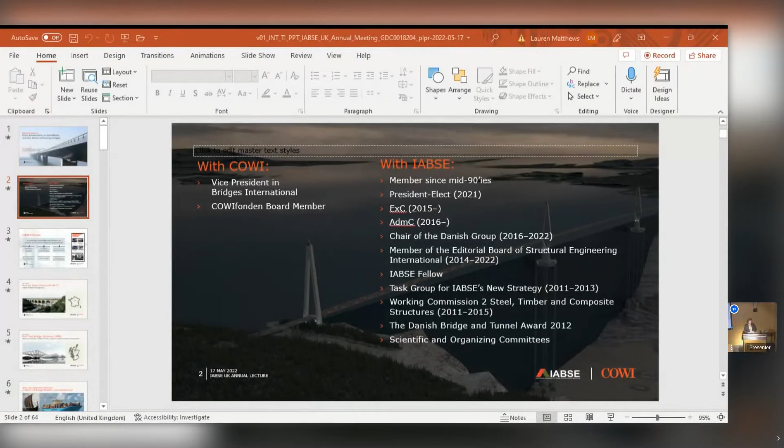So that was a bit about my activities with IABSE, and as Ian said in his introduction, it's really a very interesting and valuable aspect. What I like about it is that it embraces all aspects of structural engineering, all types of structures and materials, and all phases of the life of a structure, from initial ideas until rehabilitation and eventually demolition. It deals with historical structures as well, so there's really something for everybody and every taste. We're close to 3,000 members in over 100 countries, and we'll soon be celebrating our 100 years anniversary. So I think there's a lot to celebrate in the association.

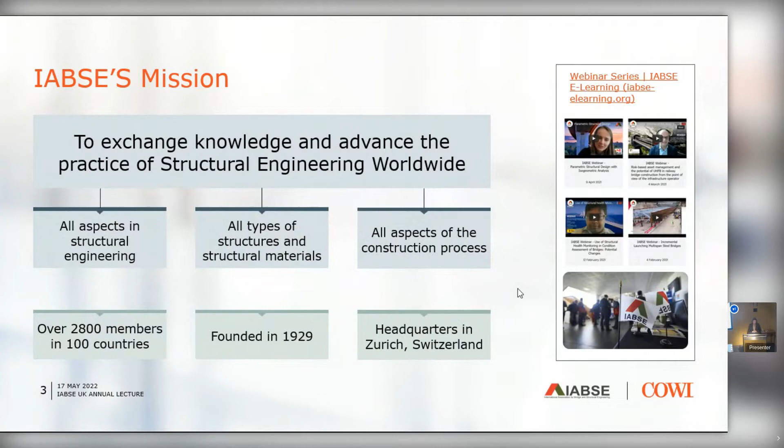So why are structures so important? As Ian quite rightly said, tonight we're probably mainly focusing on the B, on the bridges, but the S&E, structural engineering, is equally important in the association. It just happened to be bridges tonight. I've picked a few examples of historical bridges or structures that I think illustrate why structures have this potential to become so iconic.

Pont du Gard is, for me, a good example. It was built more than 2,000 years ago as an aqueduct, and it served as an aqueduct transporting water for 500 years. Then it fell into disrepair, and it wasn't really used until 270 years ago, when it was upgraded with a road. As you can see behind the lower level of arches, there's actually a road now passing across the river. I think that's a good illustration of how old structures can be put into new use and become a very meaningful part of current infrastructure.

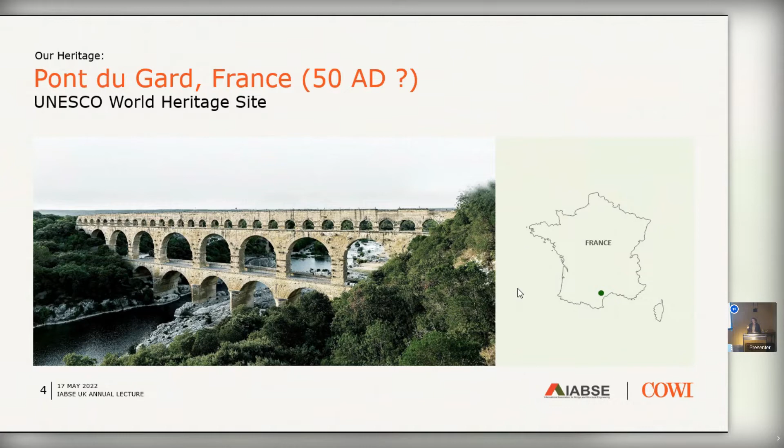Another one I like is the Forth Rail Bridge in Scotland, which, as the name says, carries a railway. It's a cantilever truss, and it held the world record for longest span for over 25 years. I think that is amazing - considering today's world records are suspension bridges, but back then it was actually a structure like this that was able to hold the world record for such a long period of time. It is a massive structure, but I think it's beautiful in its own way, because the form illustrates the function, and you can read how it was built out of the structure itself. It's a wonderful example of a structure where somebody put a lot of effort and skill into it, and it's still in operation - over 130 years still in operation. These are really great examples for inspiration.

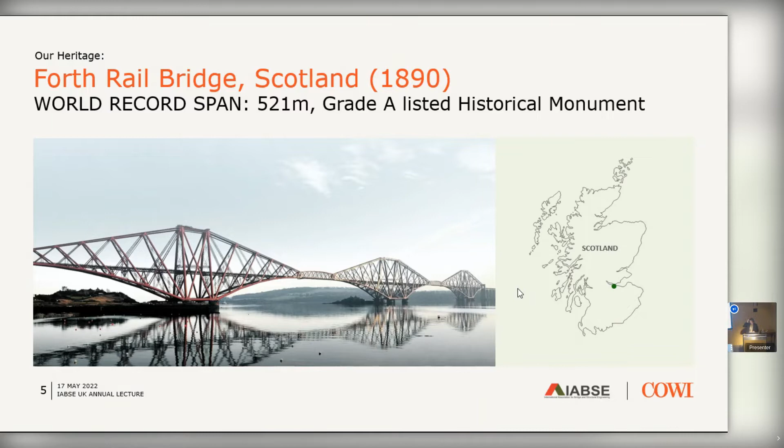So none of these bridges had any Danish input, or at least very little. So how did Denmark become a nation of bridge builders? To tell you the truth, I actually think it started with us being seafarers. I couldn't resist the temptation, being in London tonight, to throw in a picture of a Viking ship, or at least a replica of one - and perhaps I should apologize for the mess that we caused in the process.

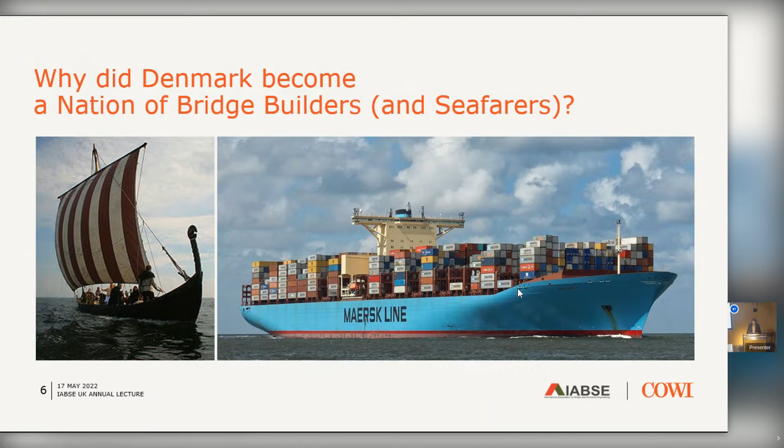We're still sailing the seven seas. This is one of the biggest container ships at the moment. It's owned by Maersk Line, a Danish shipping company. So somehow it is linked, and it is, of course, because our country consists of over 440 islands, and there has always been a need to cross the sea or cross obstacles somehow. So I think it's fair to say we started as seafarers, but we became bridge builders.

I would also note that it's a very flat country. The highest natural point in our country is 170 meters above the sea. So we are very concerned with rising sea levels and the effects of climate change. That is something that feels very real for a country with that topology.

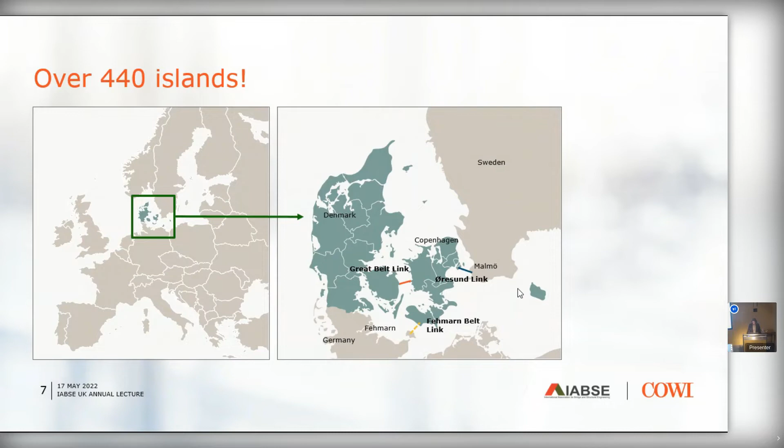We do celebrate our heritage, and here is a selection of the current Danish banknotes. On one side, it has artifacts from the Stone Age, the Bronze Age, and the Iron Age. On the other side, it has important Danish bridges. And on the biggest bill, we also have the biggest bridge, the Great Belt Bridge. So the entire collection of banknotes has a bridge on them, which illustrates how important it is for us.

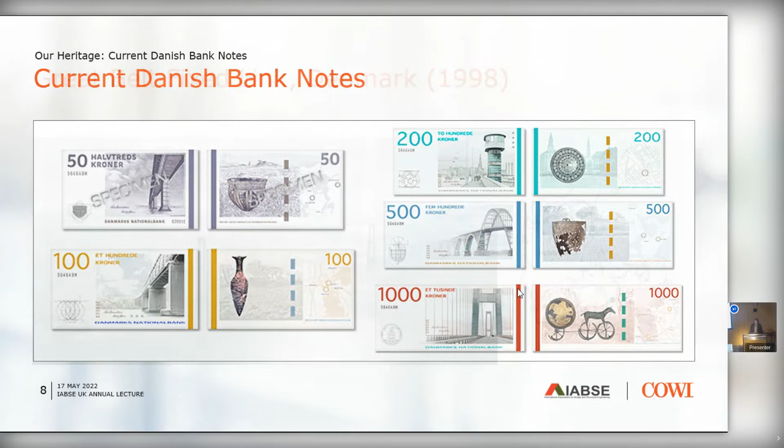So that takes me to the Great Belt link, and I understand there are actually people in the audience who have worked on it. So if you have some comments, please add your story.

This was the first project I worked on when I joined COWI in the mid-90s. It was the last phase of Great Belt, and during construction, after the main span had been closed, it was observed that it suffered from vortex shedding. We had hoped that when the asphalt was put on it would dampen it, but it didn't. So I was part of the team that had to, in all haste, retrofit it with guide vanes, little devices underneath the deck that suppress the vortex shedding.

According to our aerodynamic specialist, it is now as stable as an eye surgeon's hand. It did work, but it was quite an interesting piece of research, because there was an expectation that it would suffer from vortex shedding. But again, why fit something that's not needed? It's a waste of material and it needs maintenance. So I think there were some sensible decisions behind waiting.

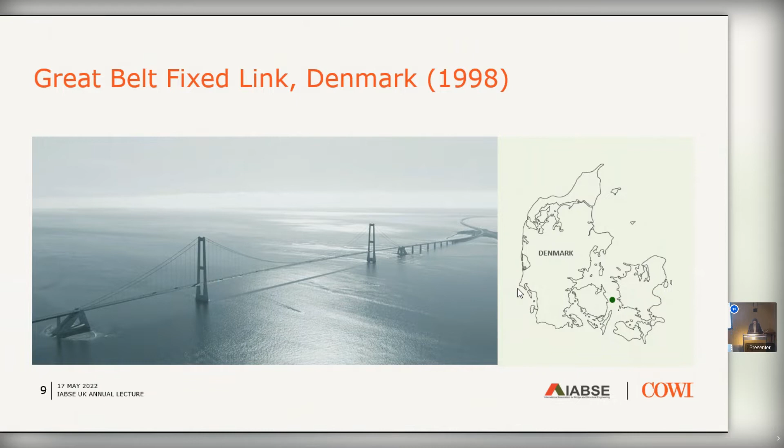If you're interested in cycling, I would encourage you to keep an eye out for this year's Tour de France, because the Grand Départ will be from Copenhagen, and the second stage will pass over the Great Belt Bridge. We'll close it—it's one of the most important pieces of infrastructure in our country, but we will close it for the Tour de France. On the 2nd of July, the peloton will pass on the bridge, and if we have weather like today, it will just be an amazing day.

Another early career project that made a huge impression on me was the Lions' Gate rehabilitation project in Vancouver. I was so fortunate to be seconded to Buckland and Taylor when they joined the COWI group, and they were working on this amazing project: a complete deck replacement of a suspension bridge which by then was 60 years old. It was so carefully planned that they could cut out sections during the night, fit the new section, which has a slightly different cross-section, and then it would be open to traffic the following morning. Really, it was just like clockwork.

With our aging infrastructure, we'll see a lot more projects like that. There is a need to upgrade our existing infrastructure and to get the most out of it—upgrade it to new use, to increased loadings, or whatever is needed. I think this is a great example of how it can be done.

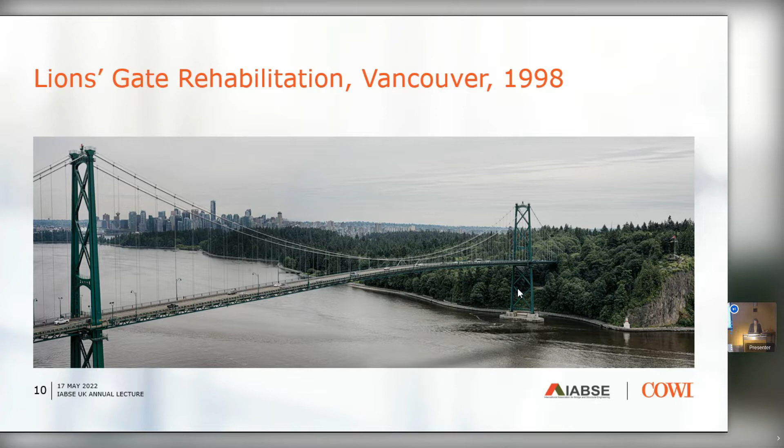And then, as Ian said, let's move to Stonecutters. I think this is a favorite that we have in common. For me personally, if I was to mention only one project, this would be the bridge I would highlight. I worked on the project for 10 years, so it has made a huge impact on my professional career. It started during the design competition, and I'll come back to who won that design competition—you probably have guessed by now. But I was on the other side, part of the team assessing the entries in the design competition. It was really interesting comparing the different schemes and seeing the imagination the teams put forward. I think there were 25 entries.

Then I moved on to be involved in the detailed design, finishing with 3 years on the construction side. Needless to say, the lessons learned and the feedback you get as a young engineer working on a construction site, you just can't pay for it with money. It's so valuable, and I would encourage everybody to have that experience.

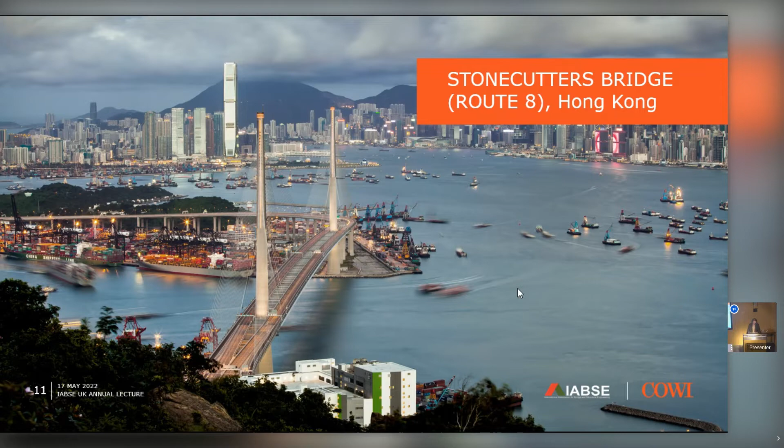So the parties involved - we should probably start from the bottom, because the winner of the design team was a group with Halcrow, Flint and Neill Partnership, as they were called back then, SMEDI from Shanghai, and Dissing and Weitling Architects, who came up with a stunning design. And what is built today is very loyal to that design.

I would also say there's a small link back to the Danish seafarers, because I got this picture from a captain from the Maersk shipping company the first time he passed under the bridge after it opened to traffic. So that was quite nice to see what it looks like from that angle.

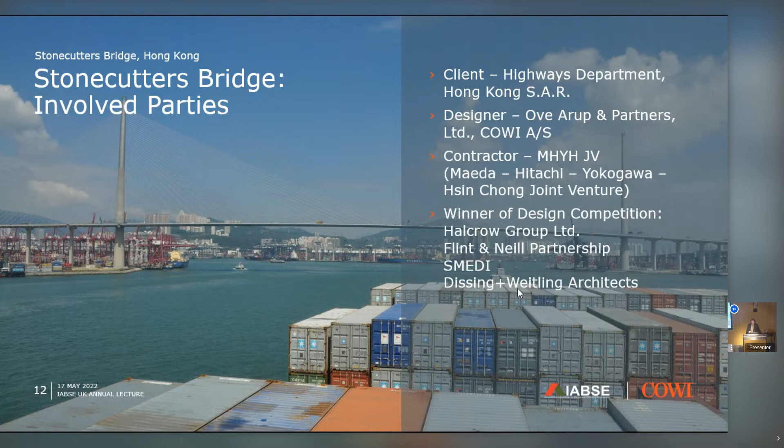What is special about Stonecutters? I think one thing to highlight is the prominent location. You can see it's right at downtown Hong Kong, so it's clearly visible from many areas on Hong Kong Island and the Victoria Harbour area.

It's prone to typhoons. Basically, it will get a direct hit, and it has been tested full scale by direct hits of typhoons. There's nothing to give just a little bit of slack on the wind loads.

It is spanning across the entrance to one of the busiest container ports in the world, so closing it during construction or during lifting of deck segments was not really an option. That was also part of the decisions that the design team made, or the ones who came up with the concept, that a cable stayed bridge would be a really good solution for this location. And in order to span the entire entrance to the container port, it required what was at that time a record span.

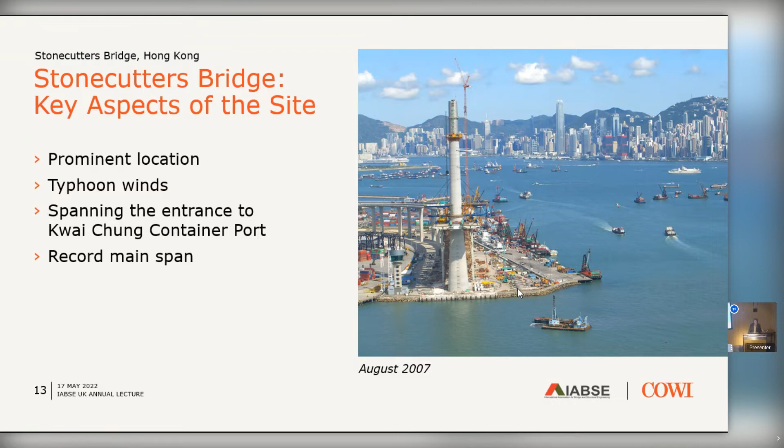So Hong Kong is prone to typhoons, as we heard a couple of times. What you see here is a track of Typhoon York. And the containers that have fallen down there - it's not even the result of Typhoon York, that was just a small typhoon that happened while I was there. Driving home one day, we saw, oops, there were some effects of that typhoon.

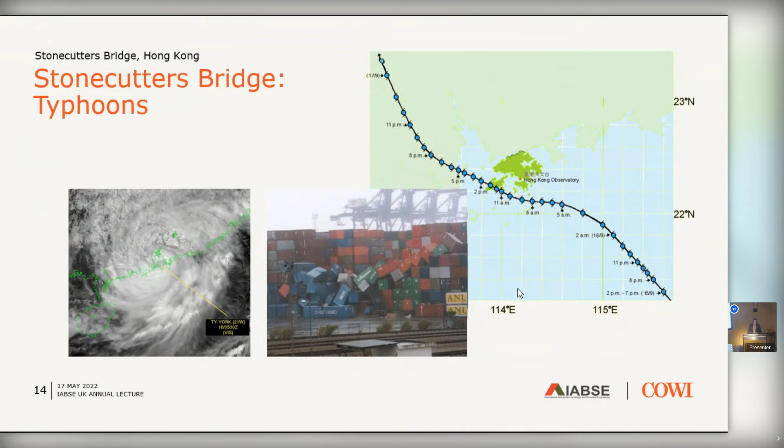So it was also appreciated that perhaps the design codes in Hong Kong were not fully able to provide what was needed as a basis for the design of a record cable stayed bridge.

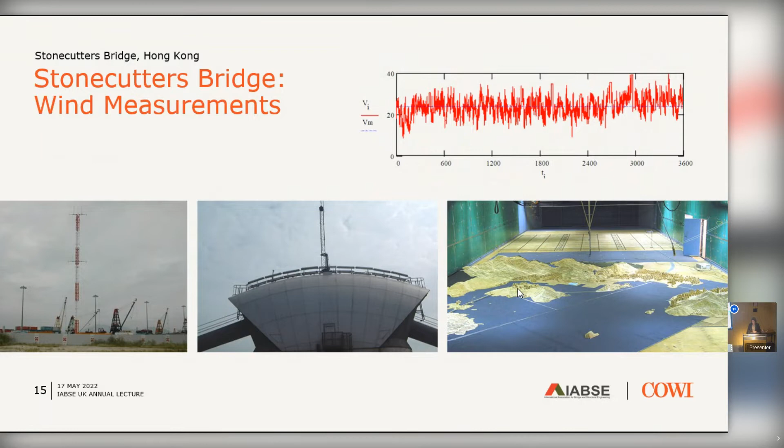One of the key aspects that came out of it was a combination of the characteristics of the wind, because it was very turbulent at that place. There are some quite high hills, definitely higher than what we have in Denmark, 500-meter high hills nearby. It was extremely turbulent, and the vertical component of the turbulence played a decisive factor in the wind loadings on the deck. That was, of course, a combination of the layout of the deck and the characteristics of the wind. We're taking that learning with us in other designs of twin decks, as we'll see a little later.

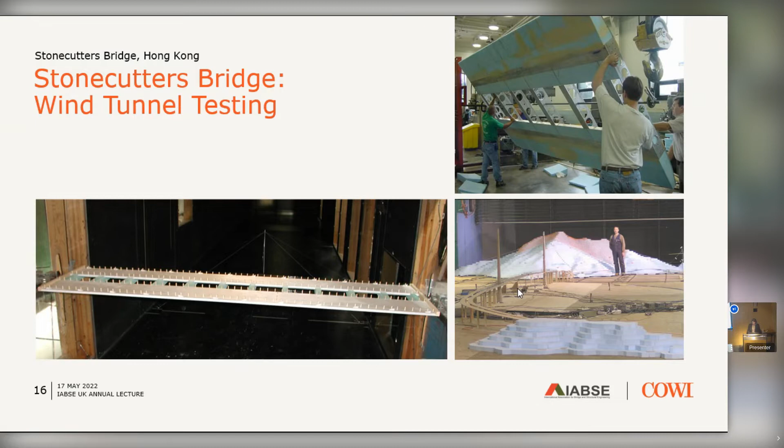So then I came back from Stonecutters in 2008, and it was a little bit of a difficult transition working on a site and then getting back into the office. I have to say, it is so enjoyable to be able to go out there and look at things and discuss with the contractor and find solutions together. But I moved back in 2008, and then I mainly focused on project management.

I haven't listed the projects here, but I worked with a couple of you in the audience on some of them - tender designs, detailed designs, checks, and the first concepts for floating bridges started at that point in time. And then I moved into line management as well.

During the same period of time, I became very active with IABSE, mainly thanks to COWI's CEO at that point in time, Klaus Ostenfeld, himself being a former president of IABSE and being very focused on technical excellence. I think that's very much the DNA that runs through the company, and through Flint and Neill Partnership, who joined us, and Buckland and Taylor, who joined us. It's very much driven by that wish to push the innovations and the boundaries of technology.

So Klaus introduced me to IABSE, and quite quickly in 2011, this group of people was entrusted with the responsibility of coming up with a new strategy for IABSE, which was at that point in time losing membership.

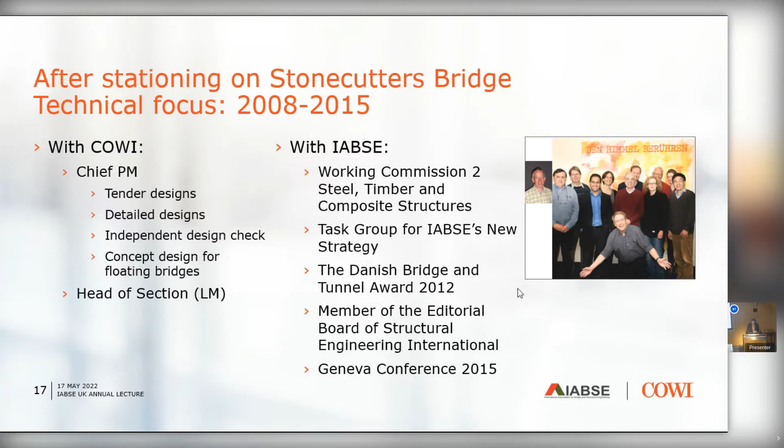Then the next steps for me - I became vice president with COWI in 2015 and a member of the foundation. COWI is owned by a foundation and by the employees, so the foundation supports research. We have quite large donations every year to various types of research, not only within the company, it's also sort of completely independent from the company. That's a very good way to supplement, I feel, what I do in my daily work.

And then with IABSE, I've been with the executive committee since 2016, and then president-elect as of October last year. I look forward to collaborating with Yaojun Ge on this transition period and making sure that all the good initiatives that have been started are also implemented and carried through. So it's a great honor.

How are we looking for time, Ian? Are we okay?

Good, then let's move on to some of these record spans, because during this period of time, we could see a global trend that the crossings that were put forward and proposed were becoming more and more challenging - deeper waters to cross, longer crossings, and if they're deep and long, they typically require longer spans.

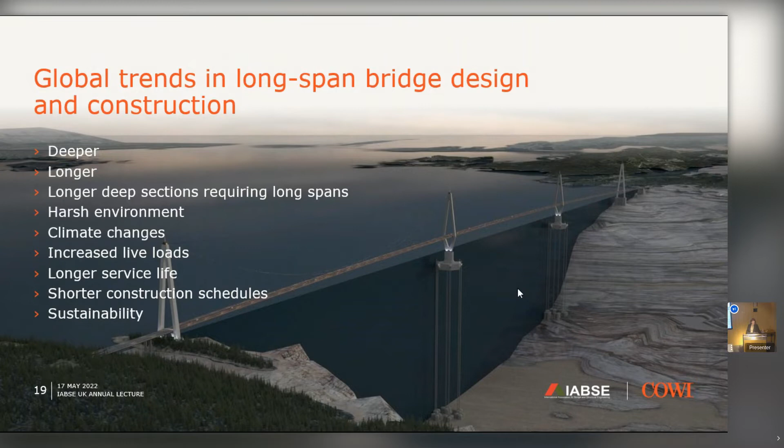So in order to do that, we need to come up with new technology, and we need to apply technology that may already be known in other industries, but bring it into structural engineering. We need to think sustainability, the benefits of digitalization, so we work really efficiently. And we need to design for the future - imagining what could be the future requirements for this infrastructure, and how we can make sure it is future-proof.

And in order to do that, it's really important that all the stakeholders collaborate. We need to pull in the same direction in order to be successful. This is teamwork - this is not something one single person can claim to do. So even though we all have a favorite bridge, I don't think any of us can say this is my bridge. Those days are over. It's really teamwork.

So let's move on to Çanakkale. First of all, the location - perhaps you can see the circle blinking down there. The blue dot in the middle, that's the Sea of Marmara, and up towards the upper right, you have the Bosporus Strait with the 3 Bosporus bridges. One of them, the most recent one, is shown there, Bosporus 3. To the right, to the east, you have the Osman Gazi Bridge, the Izmit Bay crossing. Then to close the circle and this motorway around the Sea of Marmara, there was a missing link, and that was the crossing of the Dardanelles Strait. So that is the Çanakkale Bridge.

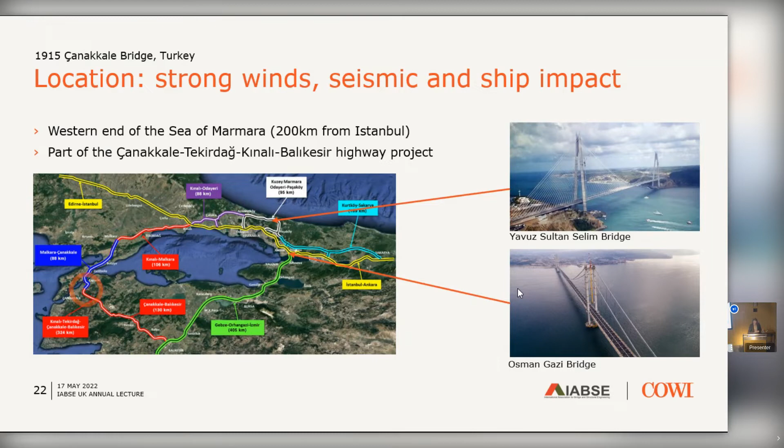So this slide is very busy, but it is really to illustrate that the red part is the important thing - the little green bridge there is just a component. Even though it can be very meaningful and challenging for bridge engineers like us to design a world record span, it's not a goal in its own right. It's because it's part of something bigger. In this case, it's part of an 85 kilometers highway that basically closes the loop and saves a lot of traveling time around the Sea of Marmara.

So what is characteristic of this site? Well, you look at the location of it - on one side you have Europe, on the other side Asia. So there's a fault line in the middle of the strait. The seismic activity is not quite as big as on the Osman Gazi Bridge, but it is quite high seismic loading. And the location near the east end of the Mediterranean Sea means there are high wind loads. As you would imagine, there's significant shipping traffic through that strait because it's the only route from the Mediterranean through the Dardanelles, Sea of Marmara, Bosporus, and then to the Black Sea. So there's a lot of shipping traffic, both container ships and cruise ships.

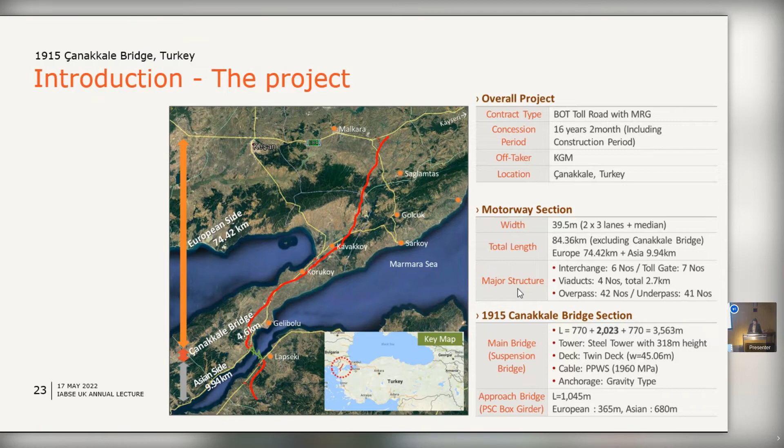There's a lot of symbolism in the design of Çanakkale, and that was there when COWI got involved in the detailed design, so there were some very strict requirements to the design. It is a historical site for the Turkish people, and therefore, in reference to 1915, it reflects on an important battle in World War I. It took place on the 18th of March, therefore the pylons are 318 meters tall. The groundbreaking ceremony was on the 18th of March, and the opening to traffic was on the 18th of March. So the symbolism is important.

And then the famous main span, 2023, that's quite an odd number - but it is because the Turkish Republic celebrates its 100 years anniversary in 2023. Originally it was intended that the bridge wouldn't open until next year, but construction was so fast and was accelerated that it actually opened a month ago. So in case you wonder what is in it, that's the explanation.

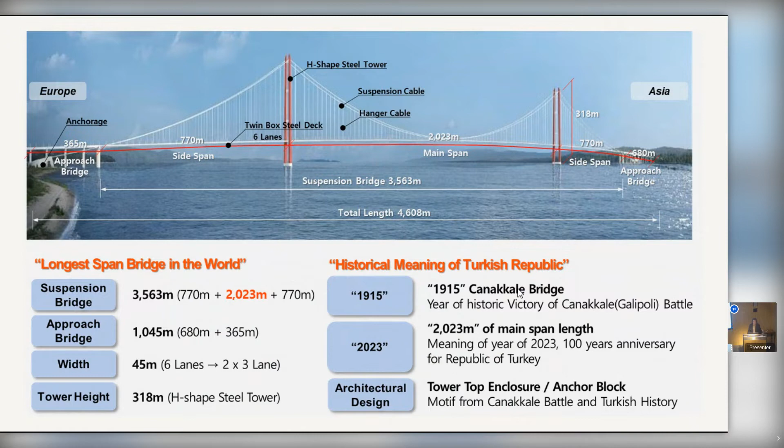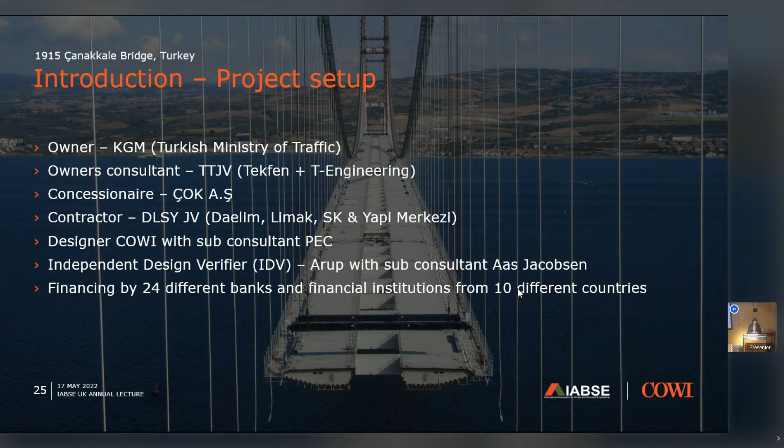The technical challenges include the ground conditions, not super favorable for such a big bridge, and we had to make some modifications. There's the seismic activity, as I already mentioned, and live loads - if you have such a long loaded length, then the live load becomes very significant. Wind climate dominated large portions of the design of the superstructure. And of course, with such a big bridge, just absorbing the movement was a challenge, so there were several hydraulic devices installed on the bridge in order to control the movements. Both the design schedule and the construction schedule were very aggressive.

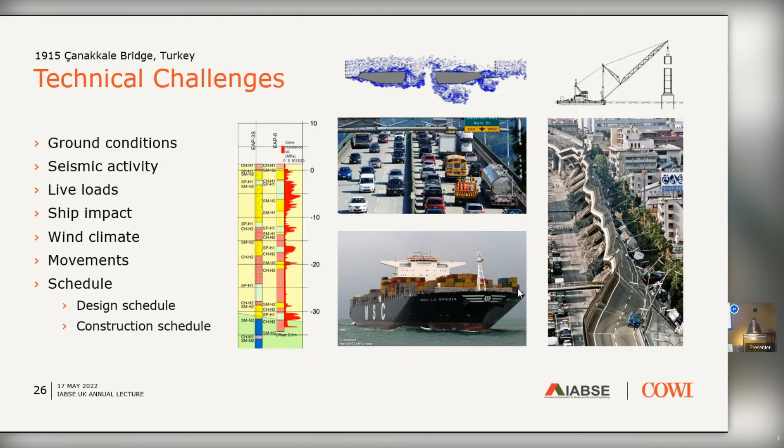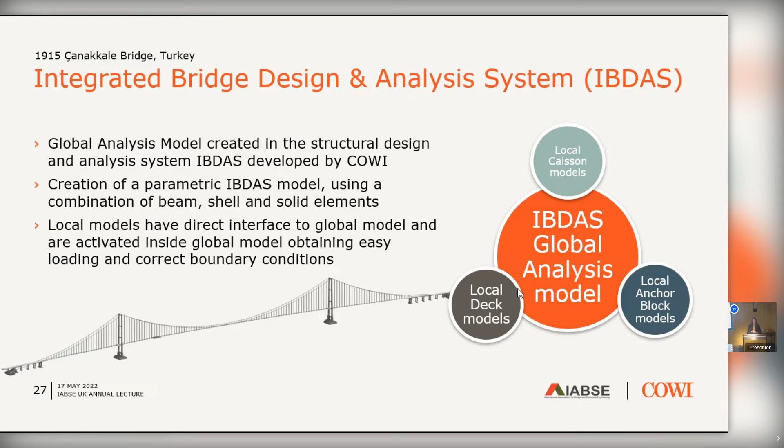In order to meet such an optimistic design schedule, we had to really optimize digital solutions and work efficiently with the data, not transferring data manually from one tool to another. In the company, we have our integrated bridge design and analysis system where basically everything takes place inside one big global model, including the construction sequences. The way we manage it, instead of having a big heavy model to work with, we have these building blocks - shell models of the detail we're currently interested in - and we can switch them on and off depending on whether we are looking at the substructures or the superstructure. In that way, we could optimize the analysis, and we also included the fatigue model in the global model.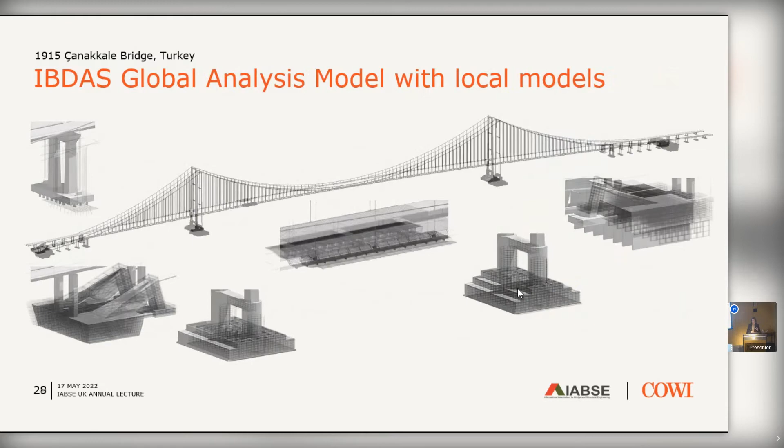That was actually based on a learning we took away from the Messina Strait Bridge, which I haven't talked a lot about yet, but I'll come back to it. That's actually a triple box arrangement because it carries both rail and road. During the design of the Messina Bridge, maybe 15 years ago, it was noticed that it was very important to have the global effects included in the fatigue stresses, in the stress ranges. We wanted to do that because we didn't want to be overly conservative - you can combine worst with worst, but then you're over-designing. As you all know, the bridge deck is carried by the hangers and the main cables, and the tower will ultimately take the compression force, so any additional weight in the deck has a knock-on effect on all the other structural components. So a lot of effort was put into really optimizing the bridge deck.

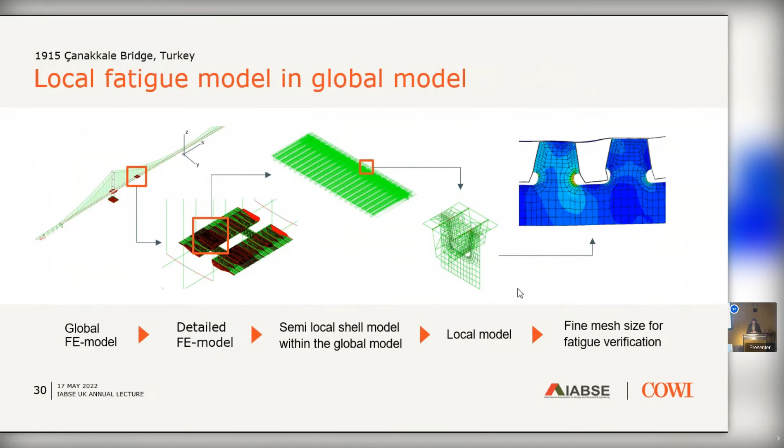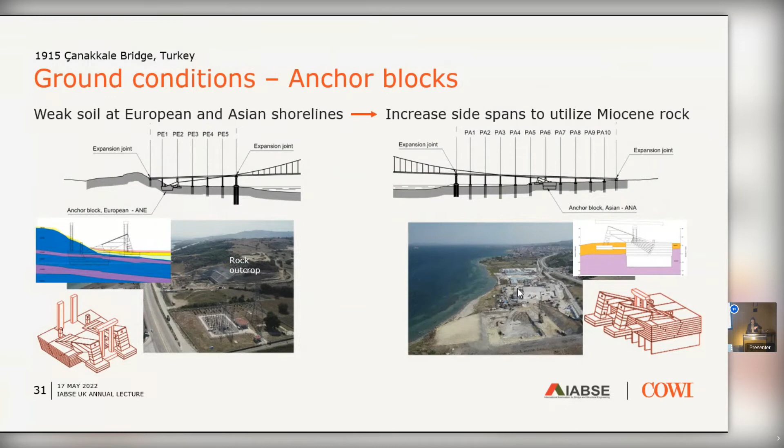One of the first things the team did when they started looking at the tender design was to look at the anchor block location, because the soil was really not good for such huge structures subject to large horizontal loads. So they decided to move the anchor blocks further away. Since we couldn't touch the length of the main span, the side spans became longer, so long that it was no longer possible to have a traditional saddle at the side span piers - there was a need for a holding down arrangement. That was a new feature introduced in order to make it possible to move the anchor blocks further back.

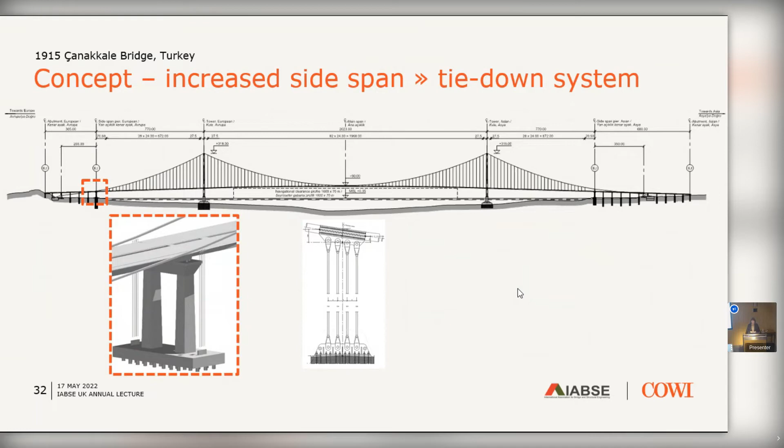Seismic design, nothing really special there - it's done the way you would expect, with a number of various time histories. Of course, it was made a little bit complicated by having nonlinear elements - the hydraulic buffers at the towers, the soil structure interaction, and the wind bearings. But it was all fairly automated and made in a way that was quite efficient.

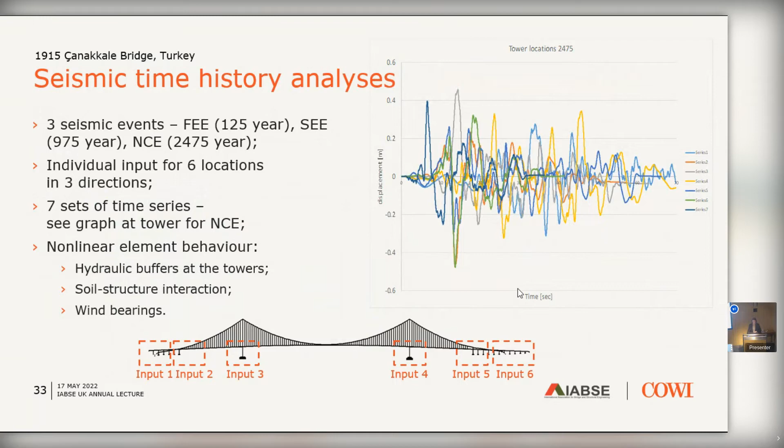In the beginning, when setting up the design basis, we put a lot of effort into reviewing the live loads, because basically our codes are not really set up for such a long loaded length. So we looked into calibrating and seeing whether there could be a little bit of saving on the live loads, and that was possible. It was not a lot, but still worth taking into account because of that knock-on effect on all the other structural elements. Of course, all of that was in close dialogue with the independent design checker and with the owner.

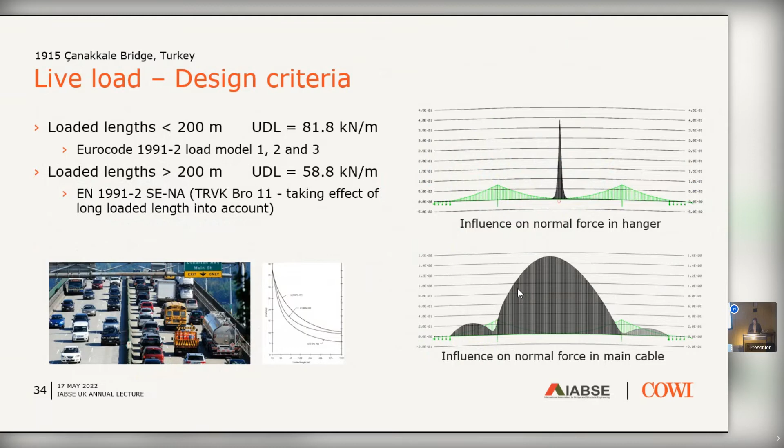Ship collision was a major issue. As you can see there, the green lines are a plot of the AIS data from actual ships sailing in the Strait of the Dardanelles. And the red dots, hopefully you can see the small red dots, that's the location of the pylon. So they are at risk of being hit by large ships.

Also, for a structure of this type, it is important to project or forecast what the future shipping traffic would be, in order to make sure that, since this is a probabilistic analysis, it's still safe towards the end of its service life.

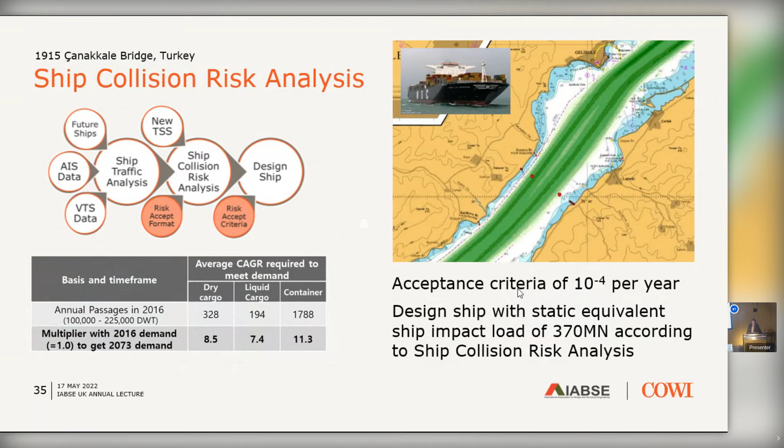So the lower part of the pylons is reinforced so that it can take the ship impact. The lower 30 meters of the towers, and of course the pylon foundations, are designed for the ship impact, and that is the governing load.

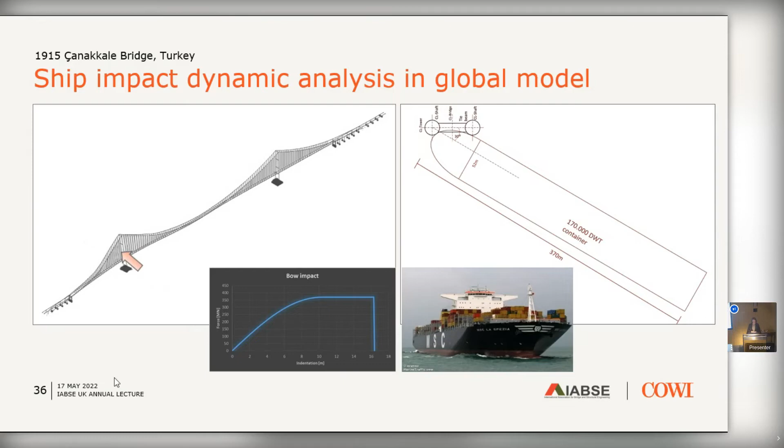So you can see here for the tower foundations, there are some tie-back arrangements to make sure that we can transfer the forces.

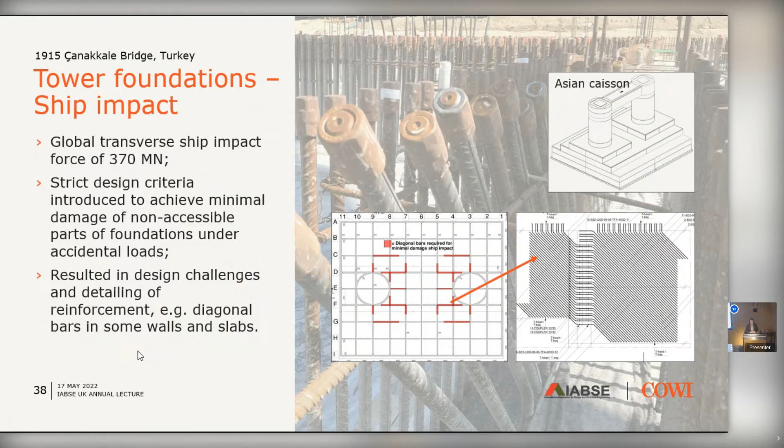The tower foundations themselves are a little bit different between the European side and the Asian side, but it's both fairly soft, mud, clay, and sand. And it was necessary to improve the soil, and that was done by inclusion piles.

So what you see on these two plots are the inclusion piles, and they are open-ended piles. The main purpose of them is really to reduce the settlements and to increase the lateral stiffness.

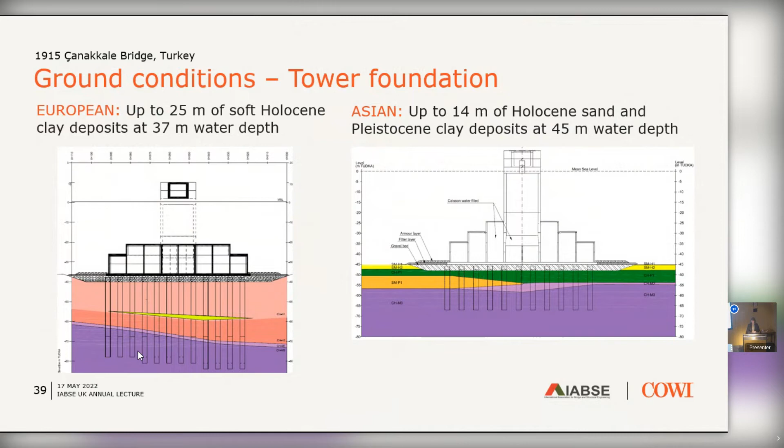So you can see here on these plots the effect. With the inclusion piles, the blue lines, and the dotted lines are without inclusion piles. So they make a huge difference to the stiffness of the foundations.

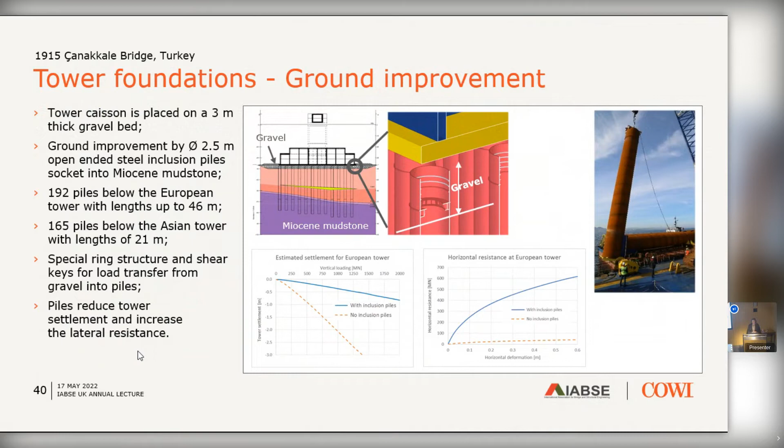Then moving on to aerodynamics, this is very much based on the learnings from Stonecutters. So knowing where to be careful, where to put extra attention and focus on the investigations was really useful in these studies. On Stonecutters, as you recall, it's a twin deck, a split deck with a monotower pylon, so it makes a lot of sense. Basically, the gap in your deck corresponds to the required diameter of the tower.

Here it's a little bit different because it's an H-shaped pylon. So any unnecessary increase in the deck has a significant knock-on effect on the pylon quantities and the cross girders in the pylon. So there was a lot of effort put into optimizing that air gap and keeping it as small as possible, while at the same time fulfilling the requirements to the critical wind speed.

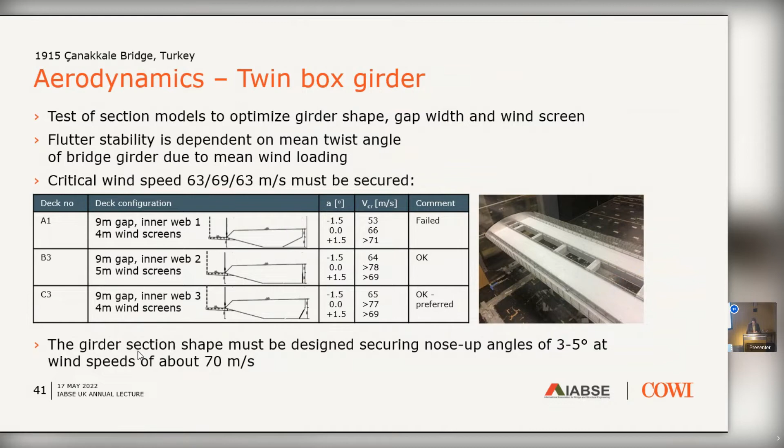This is just a list of the various places where wind tunnel testing was carried out. The large models were tested in Canada. There was testing carried out at Force Technology, which is close to our office, so very convenient for the design team. And also in China, where the full bridge model was tested, because it requires a very, very wide boundary layer wind tunnel.

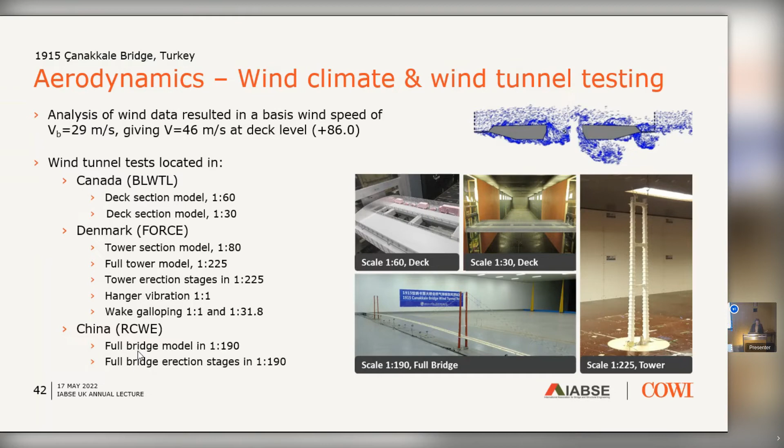And here comes perhaps the biggest challenge. If you ask the design team, they will say forget about the technical challenge, this was the challenge: a very compressed design schedule, basically only 15 months to complete the detailed design for a world record suspension bridge. We started by being granted 2 months to review the tender design that had won, and it was basically just head-on doing the detailed design. Of course, lots of activities had to take place in parallel to make that possible.

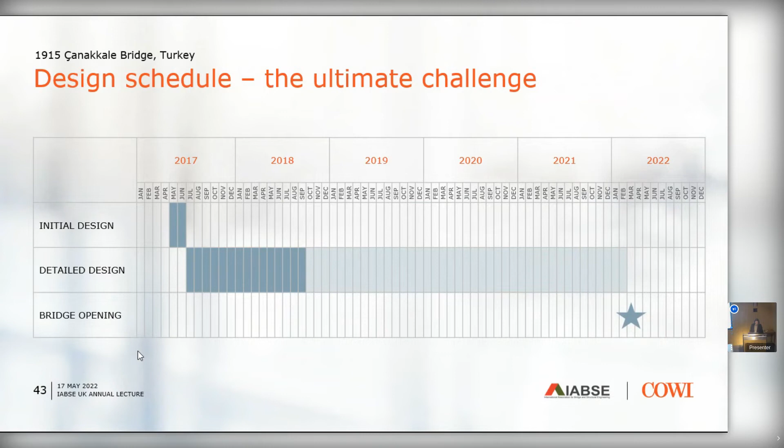In all fairness, I would say the contractor was equally aggressive with his own construction schedule, starting in April 2017 and opening to traffic on the 18th of March this year. So a very accelerated time schedule.

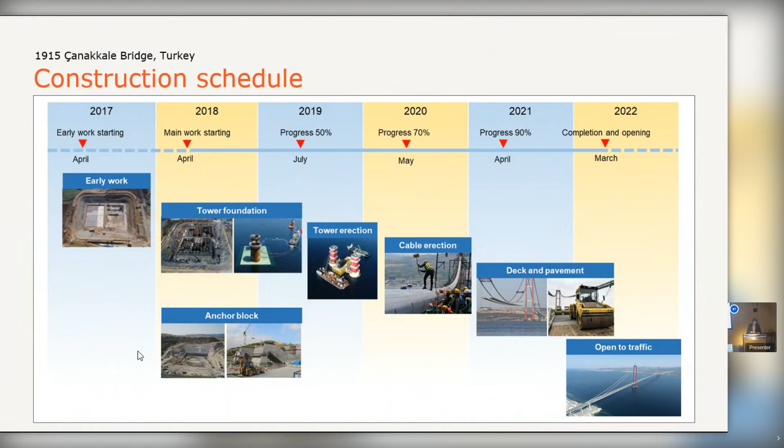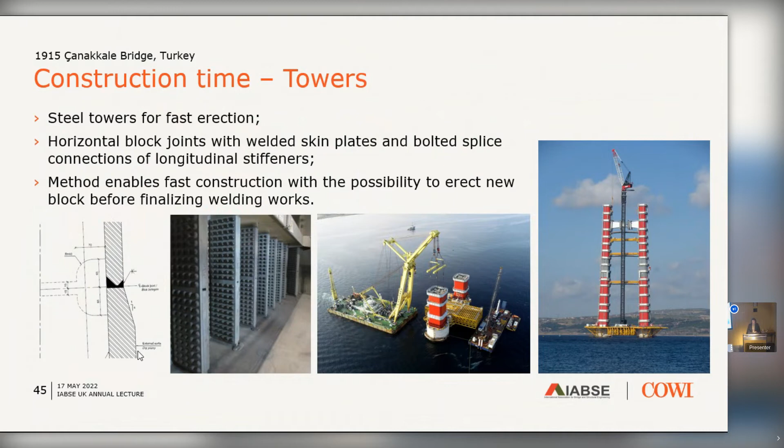A lot had to be prefabricated to avoid time-consuming fitting on-site and weather-dependent operations. Similar to the Osmangazi Bridge, the towers on Çanakkale are in steel. It helps for seismic performance to keep it as light and ductile as possible, but it's also to speed up construction. It was a mix of bolted and welded details: the stiffeners on the inside are bolted and the skin plates are welded. We made careful analysis to help the contractor accelerate, so they could continue installing blocks before completing the welding. Since the towers are on the critical path, that helped achieve the construction schedule.

Another thing, and it was a bit of a leap of faith for us, we decided to go into BIM for Çanakkale for the first time on such a big project. It wasn't a requirement from the owner or from our client, the contractor JV. It was something we decided to do because we felt it was the right way to always control the quality, control the geometry, and capture all the changes as they happened. You can't really call it BIM, it was 3D modeling, but it was really our first experience with it.

Gradually it gave us the appetite to integrate it with our in-house program, the Finite Element program. Today they're much more integrated and they speak to each other, and it's so much easier because we control the code of the Finite Element program ourselves in-house. The only thing we didn't draw in 3D was the towers, simply due to lack of resources, and we regretted it ever after. We wished we had the towers in the 3D model as well.

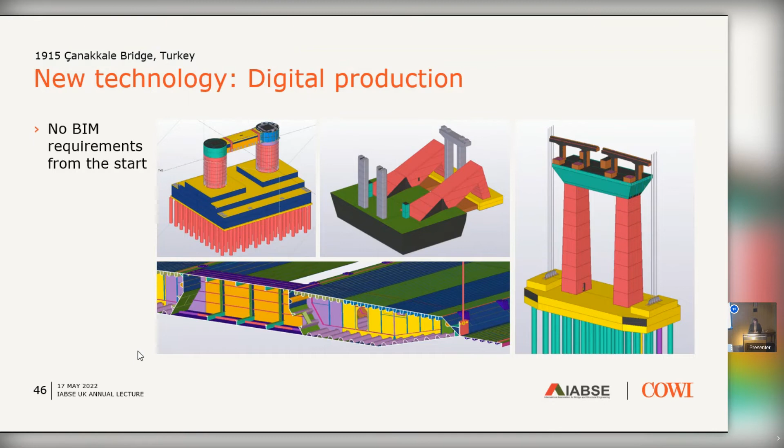But it came in very handy at a point when there was a request from the contractor side to accelerate on site. I'm not saying they were delayed, they could just see they needed to speed up construction. A particularly critical detail was the plinth, the connection between the tower, the pylon caissons, then there's a tie beam and a plinth, and then the steel shafts can start being constructed. That's a very tricky detail because you have concrete meeting steel, permanent works and temporary works.

It was to a large degree based on in-situ processes, and they wanted to go prefab instead. So we had within two months to change the entire construction method for that very busy detail, and we couldn't have done that if we hadn't had our BIM models already available. They became very useful in communicating with the construction team about tolerances, sequences, and what temporary works needed to be there and when they needed to be cut out. For us, it was a fantastic learning journey, and we haven't regretted a single moment, even though there were some frustrations on the team.

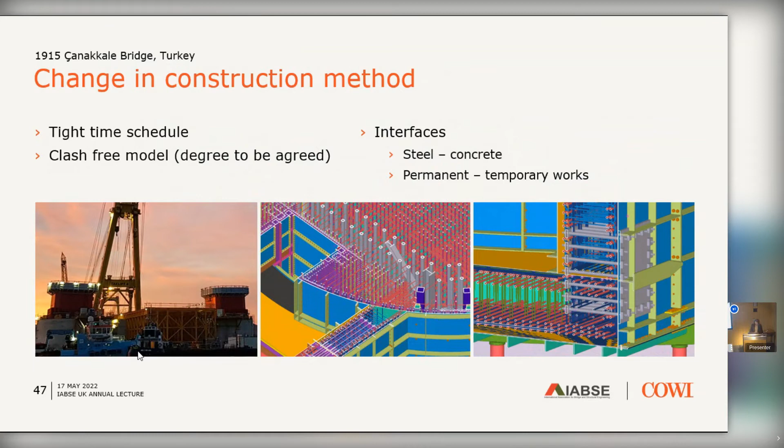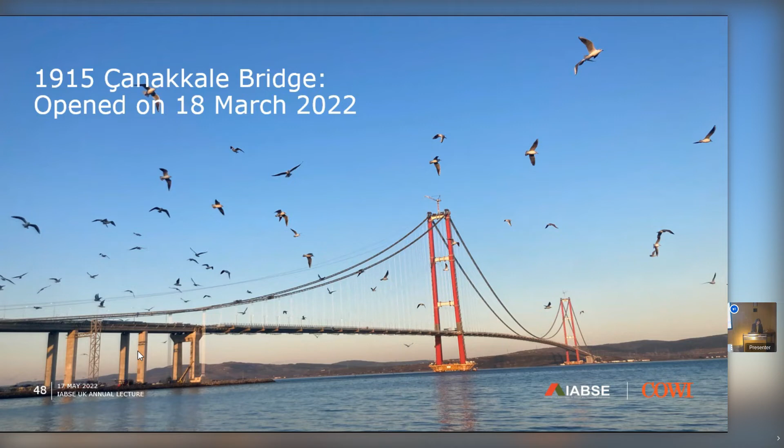Good, then let's move north to Norway. Are we still okay again? Yeah, we're good. Don't want the bus to be leaving for the boat without us.

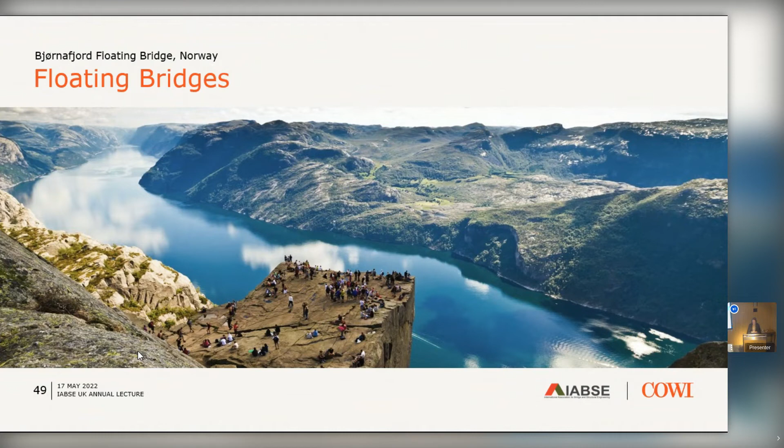Floating bridges. This is a picture from a famous place in Norway, one of the very scenic fjords. If you continue the slope of the mountain, you can imagine how deep it is, and it is very deep. This is Bjørnafjord, just south of Bergen, the second largest city in Norway. It's a stretch of almost 5 kilometers, and for 4 kilometers it's over 500 meters deep. This is the easy one, they have several crossings, so this is the easier one we started with. Some of the fjords are up to 1.2 kilometers deep.

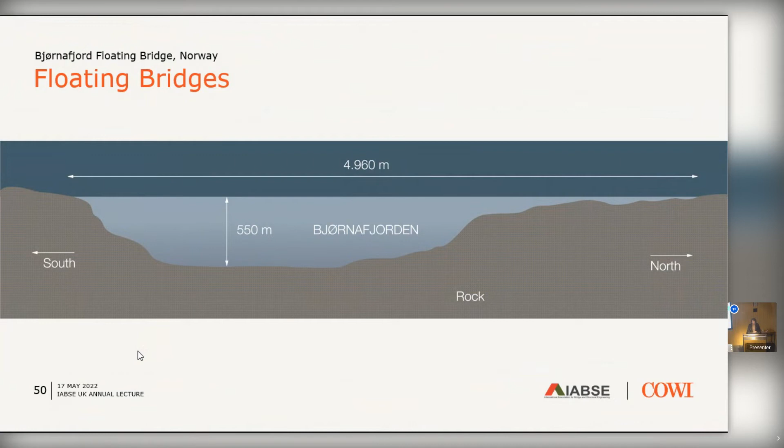So we'll need all the innovation and technology we can find.

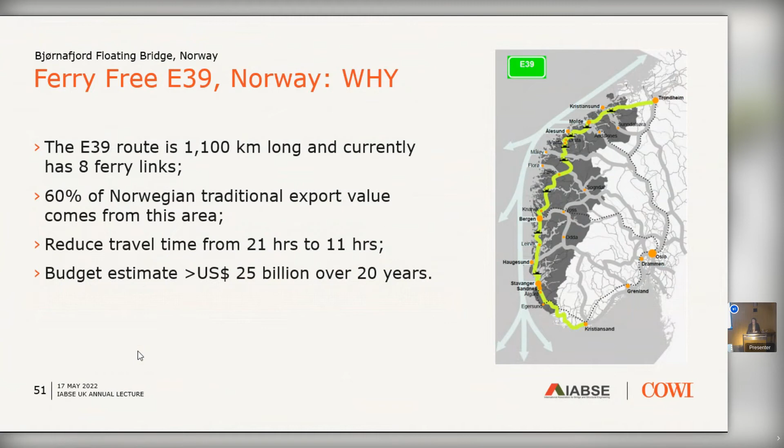So there is a huge investment in Norway to provide fixed links for all of these crossings, and the only way to do it in many cases is to provide floating bridges. That's not entirely new technology - there are a number of floating bridges around the world. Norway has 2, North America has some, and also other parts of the world.

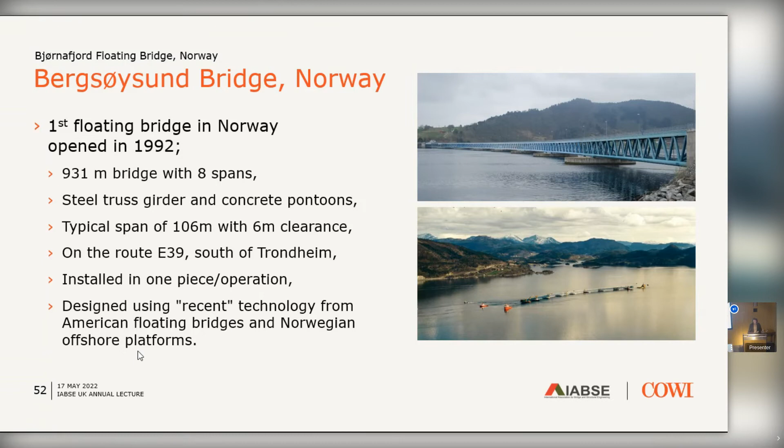So that was the basis for looking at various ways of crossing the Bjørnafjord, this 5 kilometer crossing. There were 3 different concepts studied. The first one was a curved cable stayed bridge where the cable stayed span is placed on land.

The other one is a 3-span suspension bridge, which is adopting tension leg platform technology from the offshore oil industry. And the third one is quite a fancy one - it's a submerged floating tube bridge. Some people call it a tunnel, we prefer to call it a bridge.

The challenge here for the 2 ones above the water is that there's a requirement for a 45-meter vertical clearance for navigation over a length of 400 to 500 meters. That's different to the existing floating bridges that are maybe placed 6 meters above the surface of the water. This one is 45 meters up in the air, so the center of gravity is something completely different. So that was a challenge.

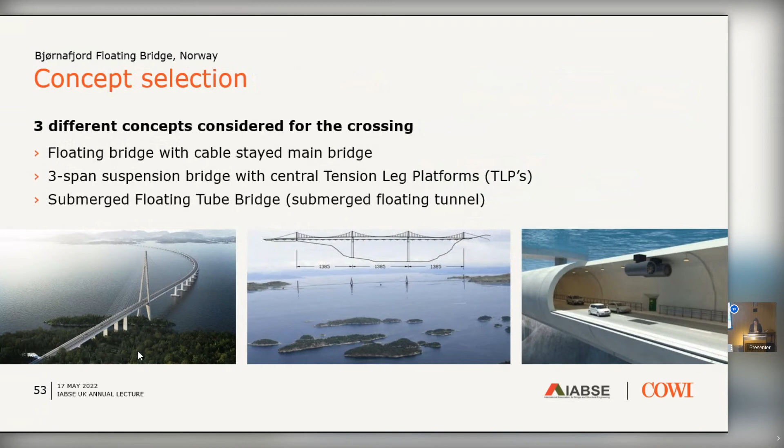So there were some quite sophisticated analyses of ship impact, and of what happens if some of the cells in the pontoons are flooded, and what happens if we lose a pontoon. That was a very important analysis, providing a lot of input to the early studies and the arrangement of the spans.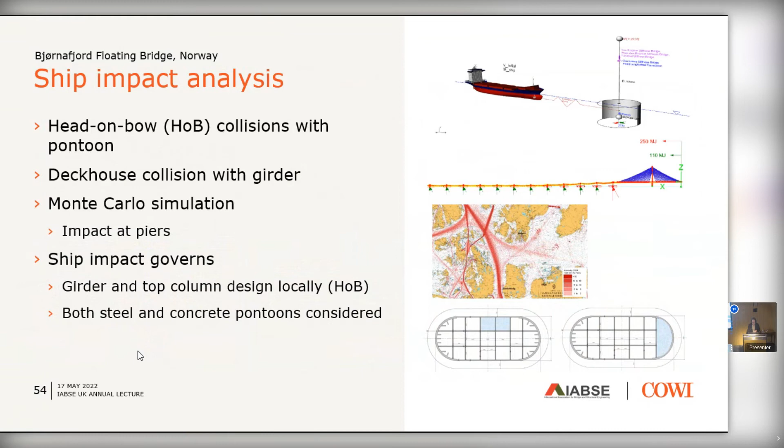And then also the construction - how to get these floating bridges in place, because they may be stable when they're installed, but they're not particularly stable in the temporary stages. It was inspired by the Bergsøysund installation process - one big curved piece assembled somewhere where it's relatively still, if you can say that in northern Norway, but at least not too harsh. And then how to ensure the welding quality, trying to connect these pieces that are moving up and down. That was quite interesting.

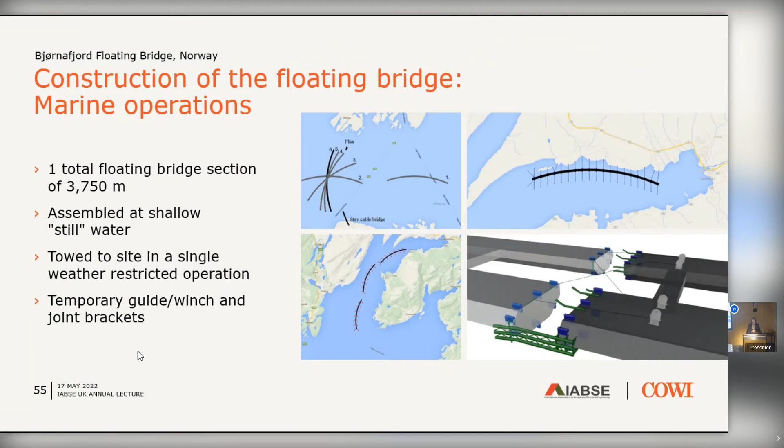The tension leg platform is even more exotic, you could say. It's borrowing from the offshore industry, where they have offshore rigs on similar water depths as we are facing on the Bjørnafjord bridge. The 2 central towers are on floating pontoons, so they're steel towers in order to keep them light. And then the 2 ones at the ends are on fixed foundations, so we imagine that they could be concrete towers. This one had a top cable to stabilize it.

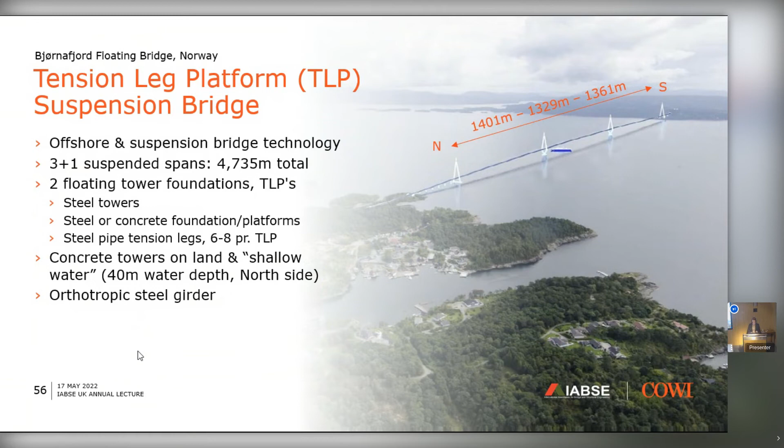We're still debating with ourselves whether that is a good idea, because it's very difficult to get it installed, but in the permanent condition, in principle, it is a good idea. This is what the foundations could look like - these tethers are pre-tensioned steel tubes, tensioned during the installation process. And the anchors can be either suction anchors, as shown here, or gravity anchors, depending on the soil conditions at that place. Unfortunately, they are susceptible to underwater landslides at this place, so foundations is a big challenge.

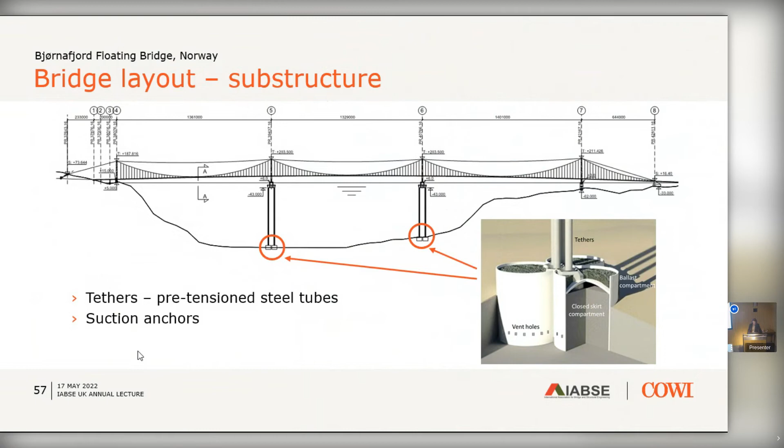And of course, there are lots of uncertainties designing something as novel and innovative as a floating bridge. So the team used this uncertainty log to help them decide the level of maturity of the technology. Basically, they were looking into: is this known technology, and how proven is it? Is it known within infrastructure, or is it known from another industry?

One big difference between the offshore oil industry and infrastructure is that typically the platforms are designed for maybe 25 or 40 years design life, whereas a bridge would have at least 100 years design life. So in principle, you need to find a way of replacing a lot of these elements, like the tethers. How do you do that? That was a big part of the job—thinking ahead, not just how do you get it installed, but also how do you maintain it and replace critical components.

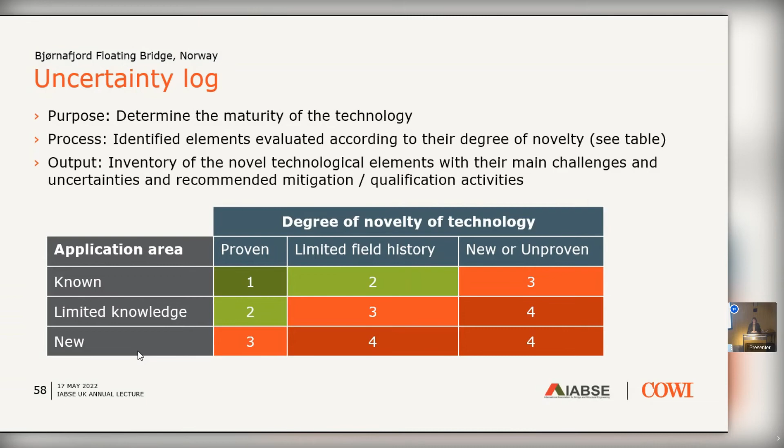Interestingly enough, now we are exporting the technology back into the energy sector, because we're taking it from the fossil fuels into some concepts for infrastructure. Now, in the offshore wind industry, they're looking into wind farms at even deeper waters than what we know today. So in order to benefit from the really good wind climate for energy production at these sites, they would also need to use some sort of floating structures to support the offshore wind turbines. So very interesting collaboration—we have a lot of collaboration right now between the bridge team and the energy team.

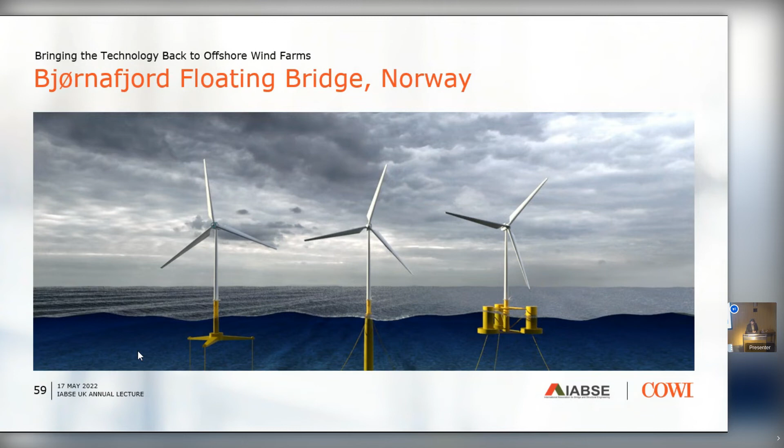So some concluding remarks on these fantastic long spans. I mentioned Messina a couple of times, so this is the first time I actually show it. The Messina Strait Bridge, I think, is a dream project for some, a nightmare for others. Definitely it was stopped some years ago when the prime minister in Italy was no longer Berlusconi. But it was carried through until a complete detailed design. So we know at least it's possible to design a bridge spanning 3.3 kilometers, carrying both road and railway.

And the Strait of Messina is also experiencing large earthquakes. So even though it hasn't been constructed—and that's of course the ultimate test, constructing the bridge, that's where we get the real learnings—definitely speaking for myself, that's where my biggest lessons learned was from the construction process of Stonecutters. But it has been designed, and a lot of the learnings have been implemented in projects later on. I think it just illustrates the importance of keep pushing the boundaries and keep investigating and exploring, because even though it may not be implemented today or tomorrow, we just learn so much from it, and we really improve our technology and our understanding.

So that's a takeaway from me. And I would also say that Messina may not be constructed in the near future, but we are looking at bridges that will beat Çanakkale in the not so distant future. In China, they're planning suspension bridges that are even longer. In Nanjing, if we get to go to Nanjing in September, they are in the first phases of construction of the Zhangjinggao Bridge, which will have a main span of 2.3 kilometers. So even though Çanakkale was the first one to break the 2-kilometer barrier, it won't hold the record for long.

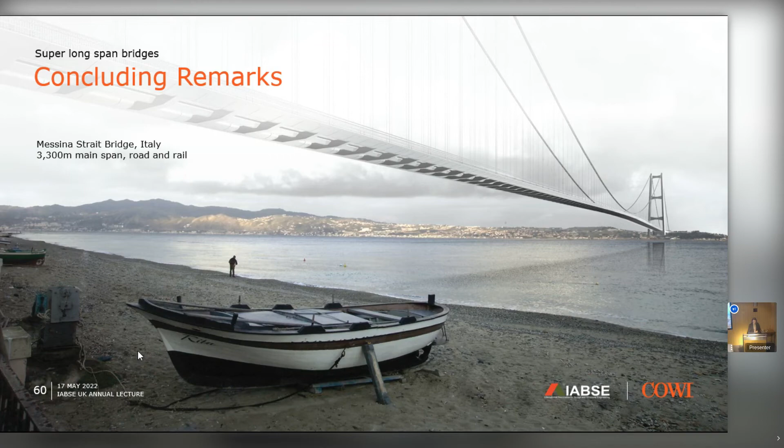If we have the time, I would like to spend a few minutes presenting you this one. Are we okay? Good, it's just 2 slides. Because it really sort of closes the circle for me, at least.

So while the floating bridges have been started in Norway, while Çanakkale has been constructed, and while the world has been in 2 years of lockdown due to COVID, in the Philippines they have also made a remarkable achievement, I would say. This is the Cebu-Cordova Link Expressway. You will see some similarities with Stonecutters—I guess you can guess who's the architect. It's the same architect as on Stonecutters. So some inspiration. It is the longest and the tallest bridge in the Philippines ever.

And for them, it was a major milestone having this project completed. It's a toll road approximately 9 kilometers long. So it has this main bridge, which is a modest 390 meters, but with a 51-meter navigation clearance. And then some quite complicated ramps and access viaducts down to a causeway. As you can see, it's traveling through a really beautiful area with mangroves.

And I think it's just amazing to see a country like the Philippines, and with all due respect, with the level of skills, and in the middle of a COVID lockdown, that they are still able to complete a project like this in 6 years. It shouldn't be compared to Çanakkale, but it's still an achievement.

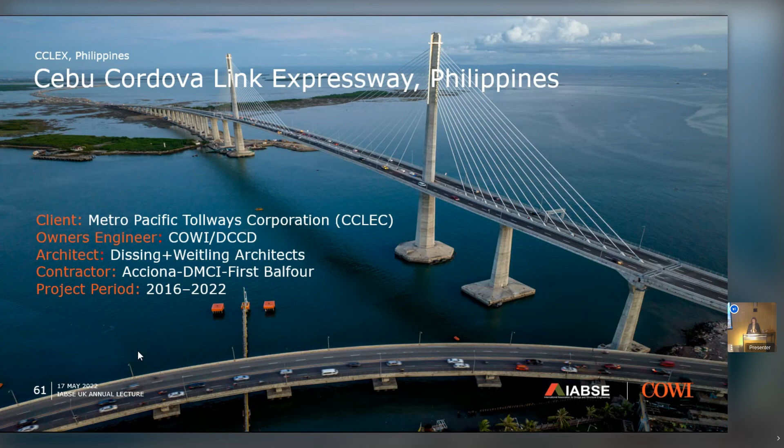And they had 2,000 workers isolated on the construction site for half a year during the lockdown. It was the only way they could do it. So this is what it looks like at night time.

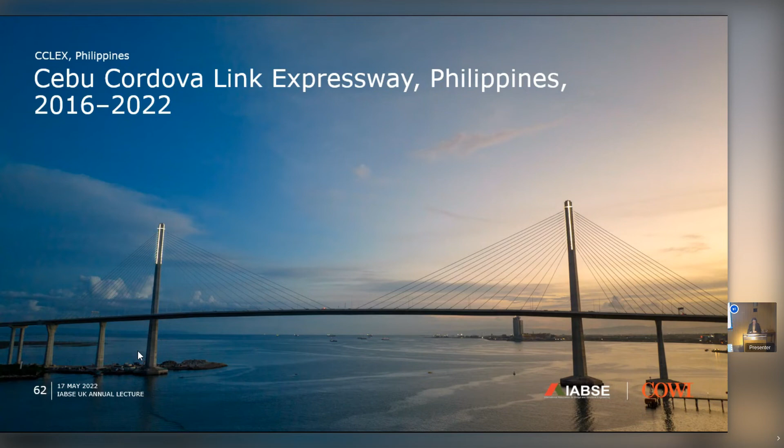And that takes me to the final slide. Now I was hoping that I could embarrass Ian a little bit, but this is a reference for me. And we talk a lot about sustainability, and it's not just carbon and quantities.

It's also the aesthetics. Now I mentioned architects a couple of times. I know there are also architects in the audience, and I could mention some of our collaborations. But I think it is important that we also consider that our bridges should be beautiful. They're standing there, part of the built environment for 100 years, and coming generations will look at them. So I think it is important that we make an extra effort. It doesn't have to cost additional money or additional materials or anything. It's more about the effort and the good collaborations, I think, and benefiting from people who are actually experts in their field, which is designing beautiful structures.

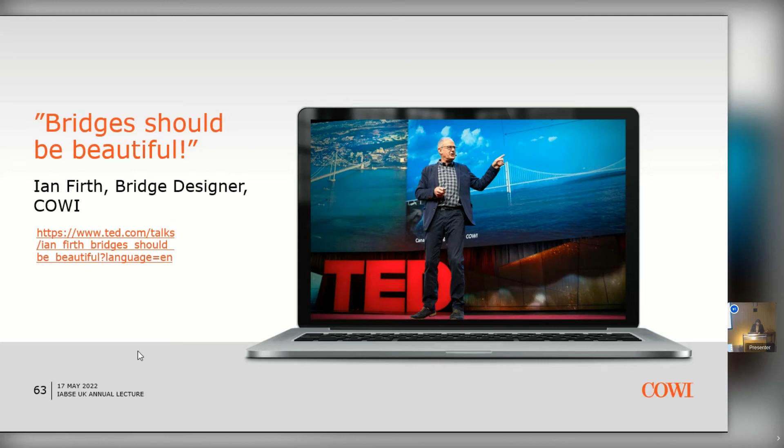So if you haven't watched this TED Talk, I would encourage you to do so and be inspired. So yeah, that was all for me, and I would just again encourage you to stay active in IABSE. It's a wonderful synergy with what you're doing as structural engineers, and do reach out. I'm sure everybody from the executive committee in the British group, or reach out to myself. We're more than happy to discuss with you how you can contribute, and if you have ideas, please bring them forward. Thank you very much.

Tina, thank you, and no thanks for the embarrassment at the end, but I suppose I get a copy of that slide. Tina, thank you, that was fabulous, and for those of us who work in the long span world, it's been something really special to see some of those projects.

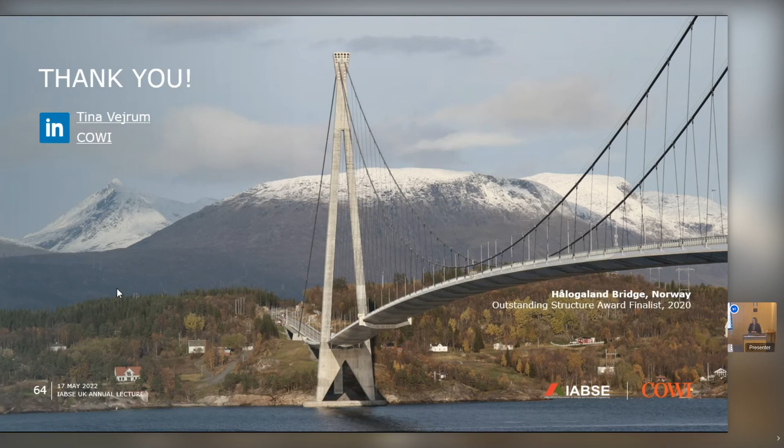So thinking about it in a clever way - where would you put additional capacity so that it enables future generations of doing more with the structure. And it's not putting it everywhere where it's not needed, but at the critical details, like the nodes and the connections, where all the concentrated forces come, should we do a little bit extra here? Or should we consider an additional deck on a bridge? Or should we consider that one day perhaps the hard shoulders will actually be used for a traffic lane? There are lots of things where we, together with our clients and the infrastructure owners, can have that discussion of what is meaningful to do today, what is meaningful to plan for, and what is simply too expensive to include now.

But it's being mature enough to have that discussion of the initial cost, the cost of operating the structure, and the cost of upgrading it. That would be my attempt at that.

Ian, I'm sure you can supplement. Well, I guess part of the answer is to do with those bits that actually can be replaced or upgraded, because there are several elements, for example the suspension bridge, that are very difficult to change - main cables, foundations. These things are difficult to change, whereas some elements you can. So there'll be different answers to different parts of the structure. But that's a great question, and it's a constant challenge - something which we're all much more aware of now, thankfully.